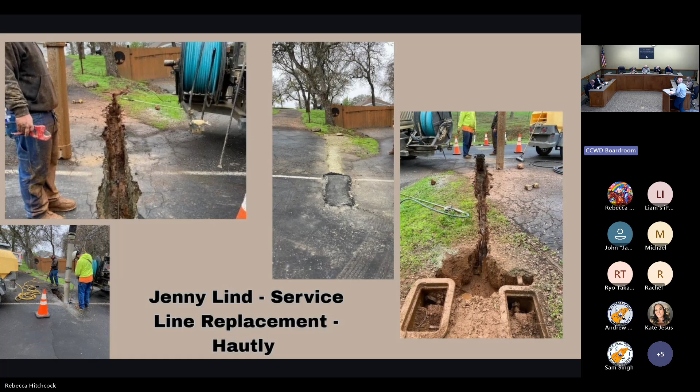Oftentimes the distribution crew, which is a separate crew completely, will expose a service line to make a repair and then find themselves in need of replacing it. This is an example of that. So they blow down, they see what's going on, and then they make the call that they're just going to replace the service. In this case, you can see it's a dual service, we call it, to two different meter sets in the bottom picture on the image on the right.

Okay, and then this is an interesting one. This is at the La Contenta waste plant. We have a potable water service that feeds water to the La Contenta waste plant for, as you can imagine, any number of things, but most notably there's a bathroom there, a sink, and a laboratory. But this is on CCWD property.

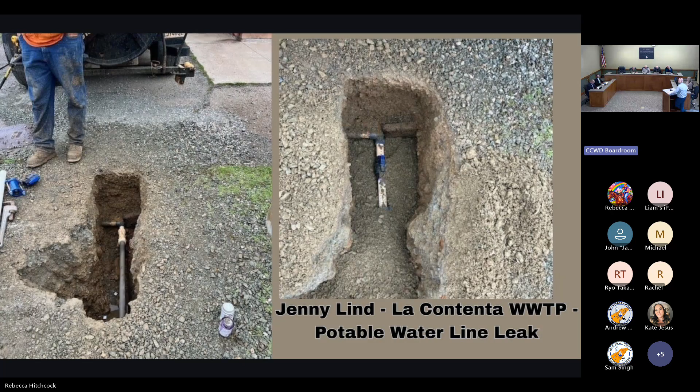The water line was installed years ago. This is a large area, so our guys had a general idea of where the water line is, however they don't know completely. So they have to expose the line and then follow it, and this is kind of what they're doing here. They note there's a buried valve in the image on the right, a coupling in the image on the left, and a T. Then they continue to look for the leak, the source of the water.

The first thing we had to rule out on this location is that it wasn't wastewater. It wasn't sewage, and it wasn't leaving the property, and that was very important, right? Because if it was, we would have had to report a spill, essentially.

So the guys continue to look, and then the construction crew gets involved because we notice on a rainy day that when the blowers at La Contenta kick on, you could see air coming out of the asphalt from the laboratory building. So we might need to take a look at that airline. The airline is large, it's 12-inch.

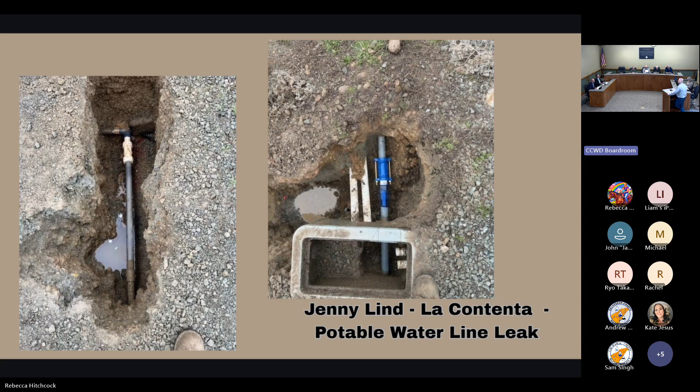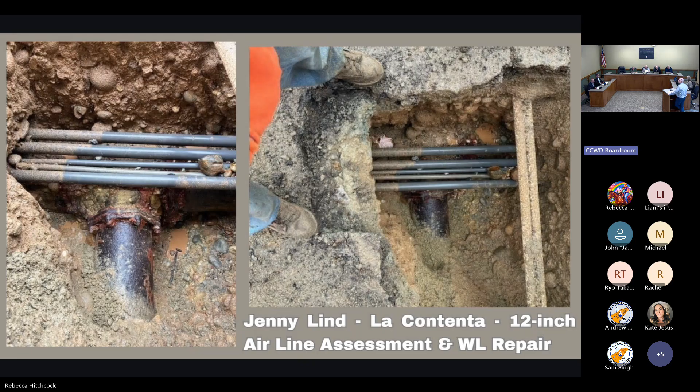So as our team exposes the 12-inch ductile iron line in the image on the left, under all the electrical conduit, we start to assess how we're going to replace this, because that aggressive soil has eroded that ductile iron pipe away. Lo and behold, the crew finds the source of the water line leak in the image on the right. You can see that coupling and you can see water spraying out of it. So they make a repair.

So it's often like one work effort flows into another. We have this exposed 12-inch ductile iron line that you guys can see is significantly corroded and needs to be replaced. So we start developing an operational plan. The construction crew, Pat and his team, and Jesse and his team get together and talk about how you're going to work through this issue and replace this line. And then you make the repair.

Unfortunately it's the entire line. If you can imagine that line extending straight, there's a basin on the left of it that holds sewage, and it's being aerated. We're allowing this natural process to take place. There are microorganisms eating the solids in the sewage. We're going to decant that water, filter it, and send it off down on its way. This line provides air to that whole process. It's almost a football field long.

And it drops in size, going from 12 to 10 to 8, 6 to 4. Unfortunately, the engineering team has informed us that in this area, related to the design of the new facility, the soil is aggressive. So unfortunately, the line was not wrapped, and this damage is from the soil.

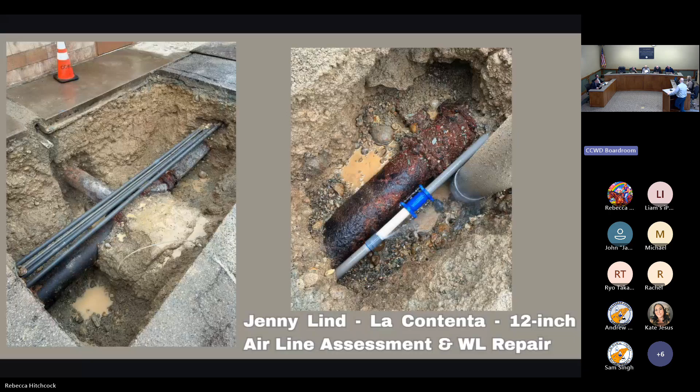And those are prime targets for vehicles. Cars love to run them over. There's like a magnetic attraction to air relief valves, so they're often destroyed.

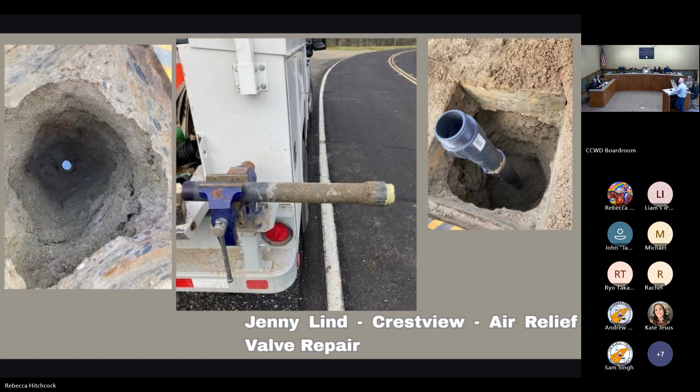So what you see here is the line, the mechanism on top of the standpipe, was broken. Our crews unthread that standpipe. They have to shut the water line off, unthread the standpipe. You can see it in the middle of the vise in the truck. Then they install a new standpipe and put a new air relief valve on, and backfill the standpipe line with usually AB rock and drain rock, and put it back in service.

There's a float inside that green mechanism. As air comes in, the float drops and the air can burp, and then when the water comes back in, it seals the valve. That's an air relief valve.

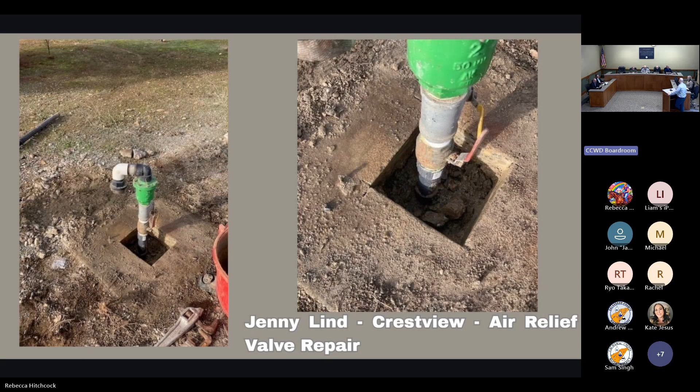How close are those? Do they stay that far out of the ground, and are they pretty close to the roadway? They can be well off the roadway, in any number of places. Sometimes when we can, we'll install protective bollards in front of them, depending on where they're at. Usually they'll have a box or some sort of cover over them. They can be subject to freezing depending on what size they are, so that's also an issue we have to pay attention to depending where they're at.

This is an example of some of the conditions of our pressure reducing valves out in the field. This is in the Jenny Lind service area, Garner and Friedman. A pressure reducing valve - you have a large valve, and you usually have a bypass valve.

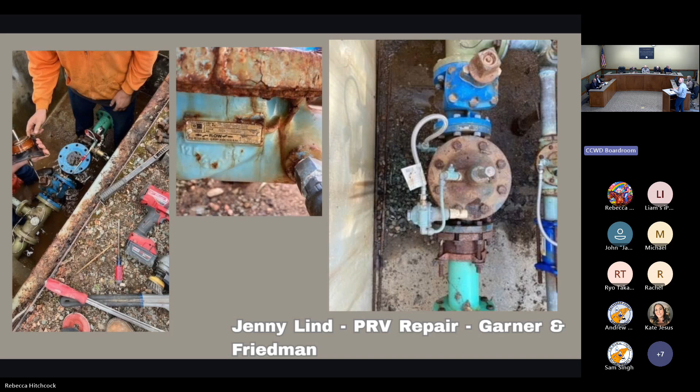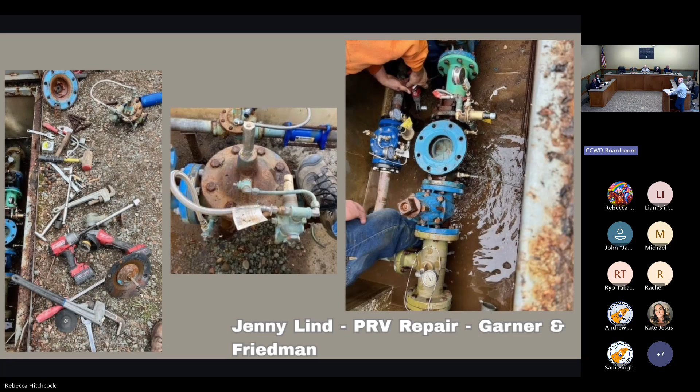The work here is a little convoluted, but in the image on the left, you can see they're taking apart the large valve to replace the components inside. There's a diaphragm, small operating equipment and components. Then the bypass valve, they just replaced completely. In the image on the right, you see that nice clean blue apparatus in the middle of the picture - that's the brand new bypass.

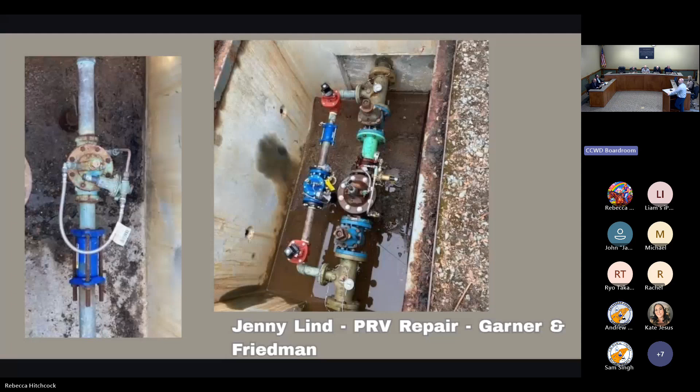And then some more close-up images of the two. Before replacement on the left, after replacement, that nice dark blue one on the right.

We have buried valves all over the system, so as our folks find them, they like to expose them and work to ensure that they're not buried again. You can see we poured some concrete slabs around these valves and built a retaining wall so that soil doesn't cover them up. Otherwise you're going to spend 4 hours with a metal detector walking around looking for a valve buried under 6 inches of dirt. This eliminates that effort and makes things more efficient in the future.

These are interesting. I just gotta say, your pipe work is beautiful. The retaining wall needs some help, we need some love there. I would call that a utilitarian retaining wall, right? We'll get some landscaping block out there. Some people use mortar between the blocks. Was it at least clay? Yeah, I think there's some bar in there.

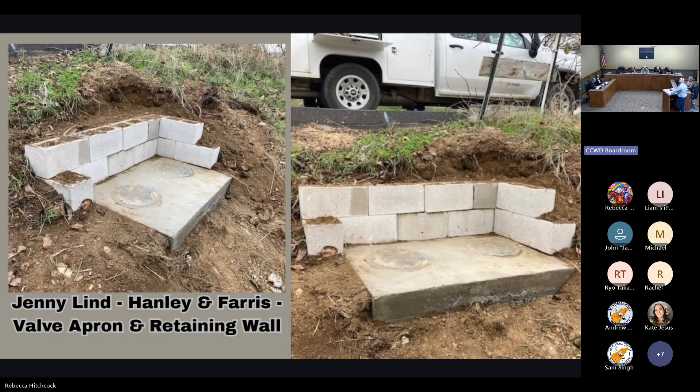Bar's going to keep it straight. Looks like it was backfilled with native. I think we're going to coat it with some leftover elastomeric coating you might have on, Kevin. Coat it with some of that. Rhino line it, we could do that too.

So there's this building that used to exist at Vallecito that we've moved all over the service areas. Here's another example of that, the construction crew moving this overhang building that we're going to use to cover rock and material in La Contenta.

Some of you may have heard of this. There are some manholes in the Woodgate subdivision where there's a swale around the collar of the manhole. CCWD is working to reestablish the grade on the manhole lid there. So we've saw cut around the manholes. This is a job that's in concert with the county - the county's going to go in there and reestablish the grade on the roadway as the district repairs.

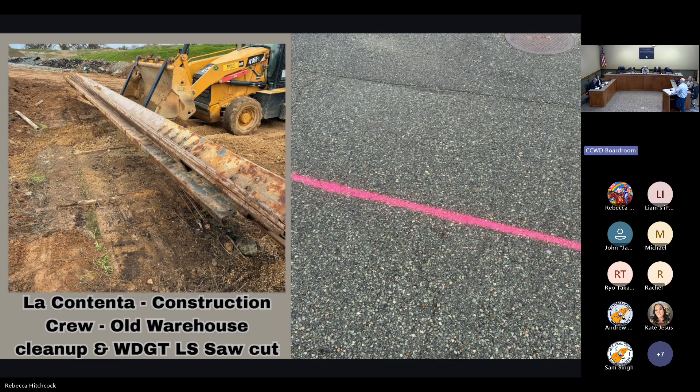Where's Woodgate? This is Vista del Lago North. You hang on the left. Oh, okay, yeah, Warmwood, Woodgate. Yeah, across the street. Yep, across the street.

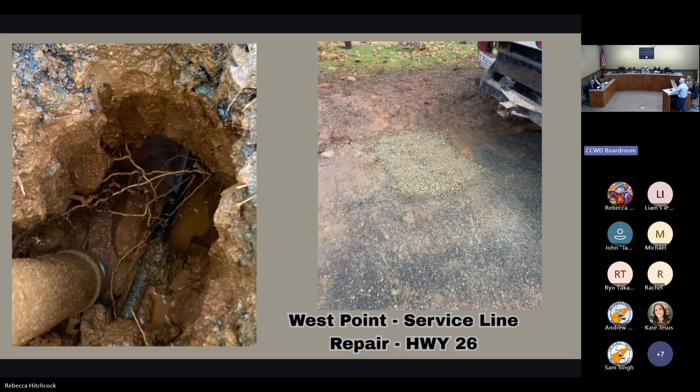Now we're jumping up into West Point. Another example of our folks' ability to listen for a leak and make a repair, exposing the leak pretty much right on top of where it is occurring. So obviously we want to minimize patches in the roadway, and it's really important that our folks listen and mark an accurate location to dig. This is an example of that. Hats off to Doug and his team up there - it's a team of one.

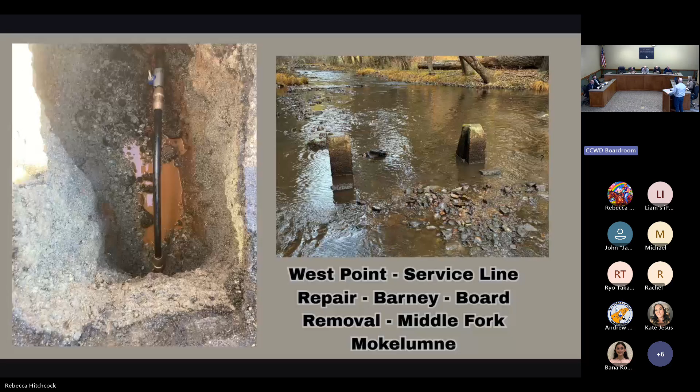In heavy rains like we had recently, how far up those bollards will that stream rise? Oh, right, all the way over. Yeah, it can still be taken out if a tree came down, potentially. Yeah, that's true, that's true.

Here's a great project, kind of tipping the cap to the work that our construction distribution crews do relative to ensuring that we have as many fire hydrants operational as possible. This is replacing 2 very old fire hydrants on Bald Mountain Road in West Point. It's kind of hard to see in the image on the left, but there was a service line that was actually tied into the 6-inch main right downstream of the fire hydrant tee.

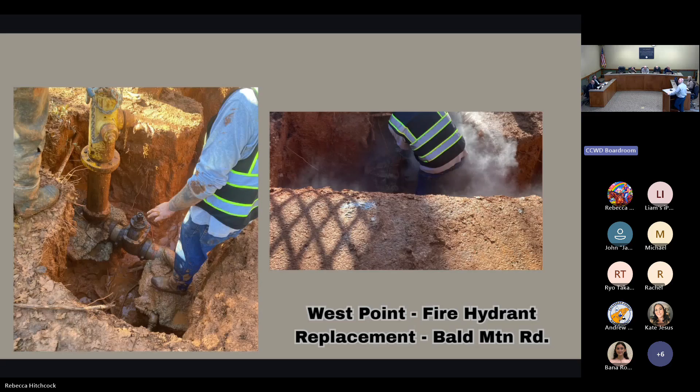The service line itself wrapped around the fire hydrant before it made its way over to the water main, and then the customer's private plumbing came back towards the fire hydrant, which you can see in that pipe kind of at the top of the left-hand image. Making sense of all of that on the fly is kind of an art, and our guys do that every single day, so hats off to them. They need to know what pipe to disconnect and what pipe to leave live, and this is an example of that.

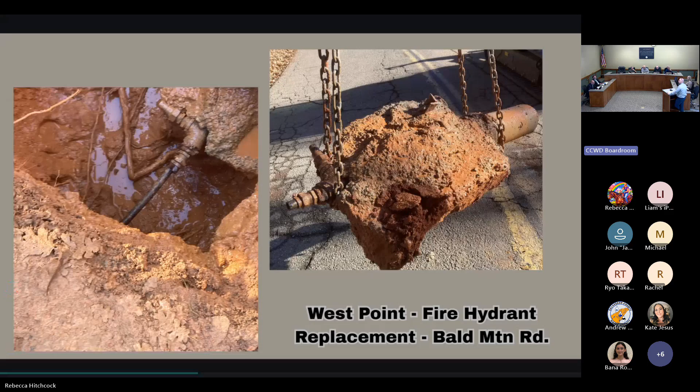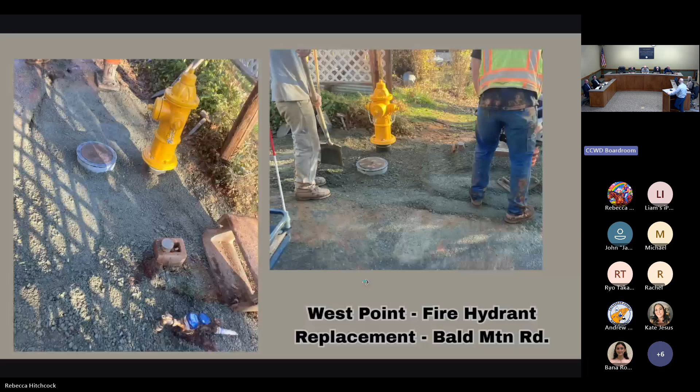You can kind of see that service in the image on the left. Here's the concrete pour on the fire hydrant kicker on the right, the old hydrant being taken away, pulled out of the hole. An example of the backfill and compaction of the brand new fire hydrant installation there, with the valve, G5 valve access in front of the hydrant. So you can isolate that hydrant if somebody decides to run over it and water shoots into the sky, rather than shut the whole universe off to turn the water off - you can shut that valve right there.

And here's kind of a before and after. So this is the old hydrant on the left with questionable operation, and then the image on the right, the sanitary concrete apron, the G5, and then the brand new hydrant.

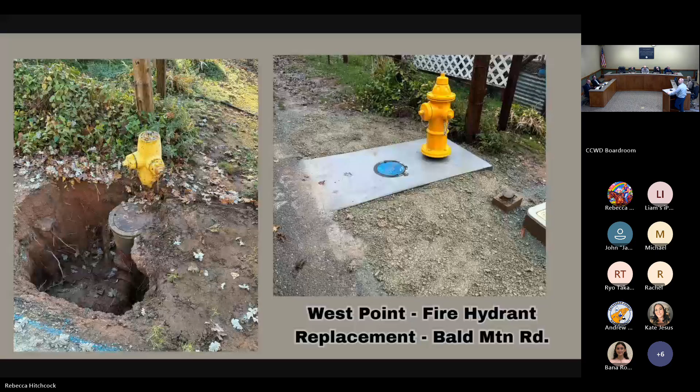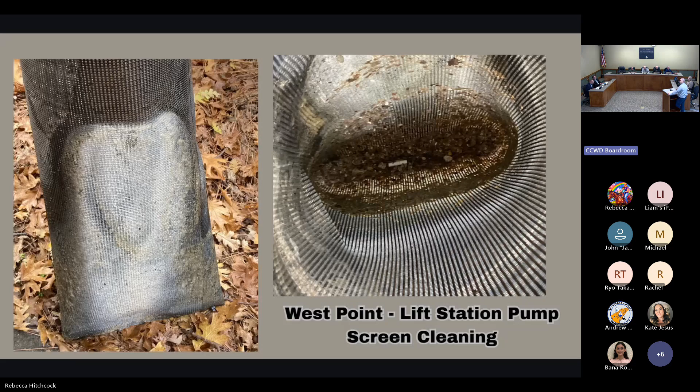Hats off to the crew for this. I love to share the lift station screen at the West Point lift station. This lift station pumps push the liquid sewage through a force main, a couple miles cross country, over a bridge, to our West Point wastewater treatment facility. Grease loves to collect on this screen, so Doug will pull this screen every quarter and hot flush it, getting all that debris off so the pumps can continue to operate without pushing up against a head that they can't accommodate.

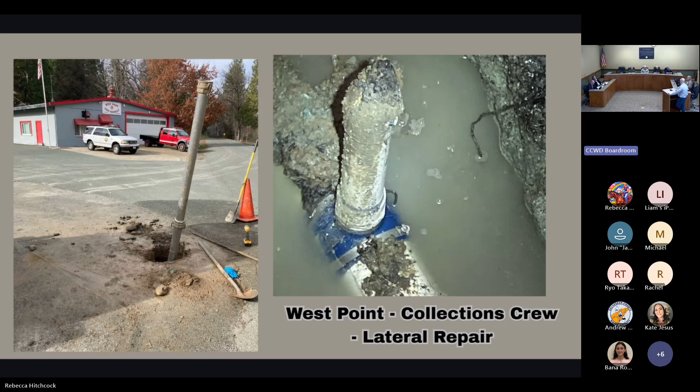So just a case and example where preventative maintenance can lead you to issues that you can then correct. Hats off to the guys for finding this as another holiday gift - I don't know if they wanted it, but they found it and made the most of it.

In the image on the right, they cut that cap and cleaned the debris out of it - you can see it's just full of debris. The image on the left is coming from the abandoned septic tank, which they flushed, cleaned, and evacuated all that water from the hole, then reconnected the whole system. So should that septic tank need to be used in the future in the community garden, it can be.

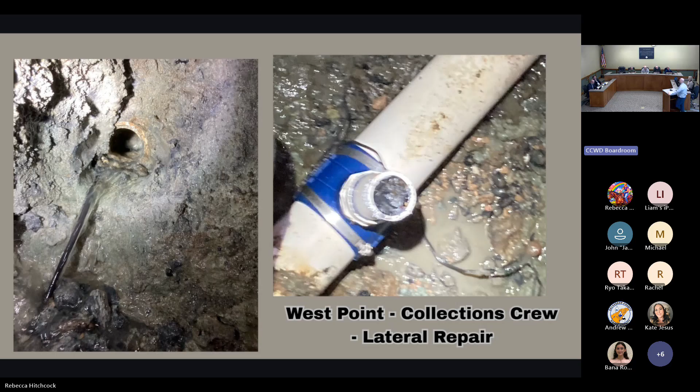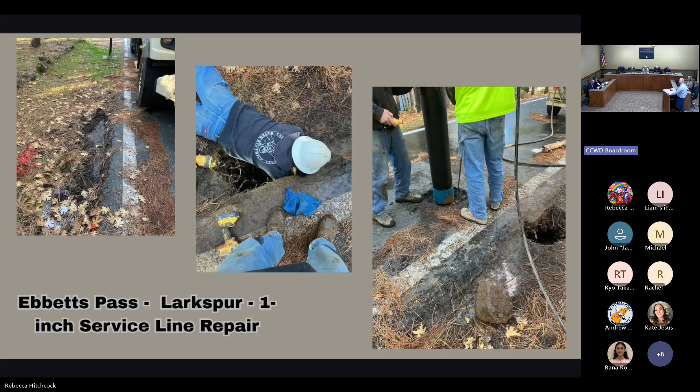Now we move up to Ebbetts Pass. This is a 2-for-1. There's a 1-inch service line in Larkspur with 2 leaks on it. You can orient yourself - you've got the hole in the image on the right, kind of on the fog line, and our folks are opening up another hole with the Vactor truck. You can see the pickup tube there. It's kind of hard to see, but there are 2 separate leaks on that service line.

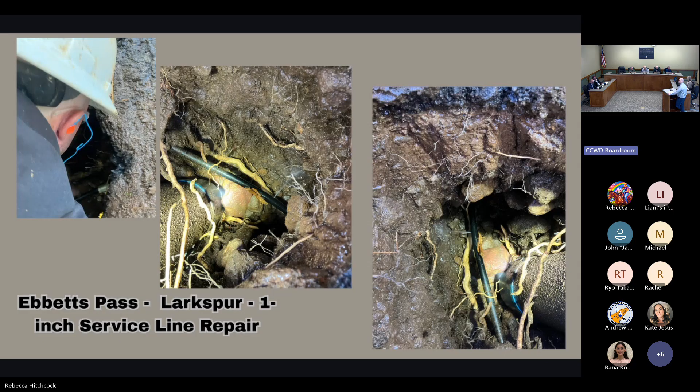You see all those roots in there wreak havoc on our system. They find a little bit of water, they're going to go ahead choke whatever it is they find and ultimately break it.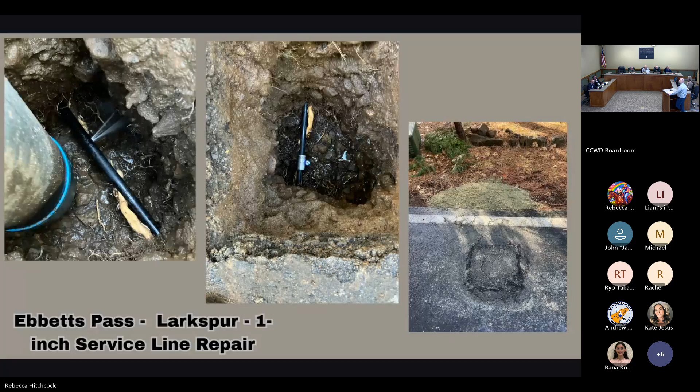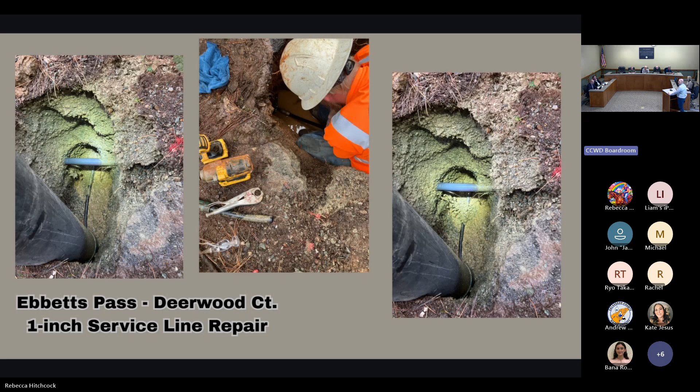Another 1-inch service line repair up on the pass. Just an example of the variability with backfill material that our guys find, and their ability to get into small, restricted places and make the work happen.

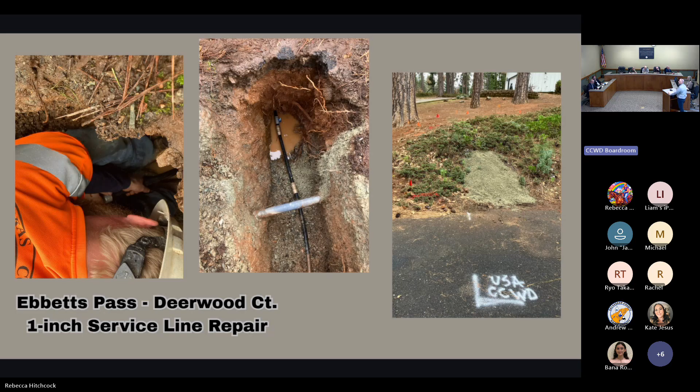You can see in the image on the right, this one was just off the road, and CCWD issued an underground service alert. You can see there's power right there, and there's a red flag in the image on the right. So our guys all of a sudden find themselves having to contend with power.

Curb stop replacement. So you guys get to see an example of what a curb stop looks like, often connected at your meter to your service.

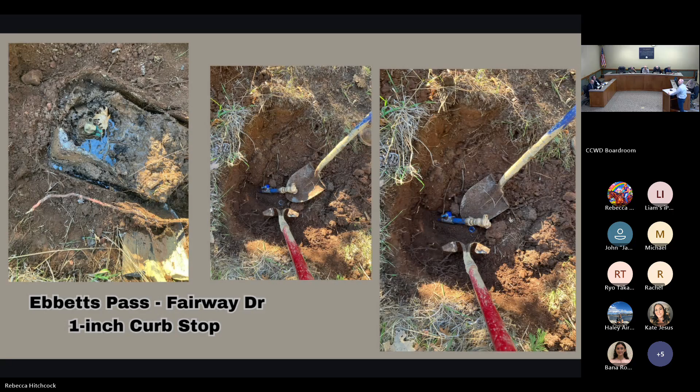Maybe this works better as a blow off. What kind of pressure is on a line? If you've got a 1.5 inch line, it's going to vary - it really depends on where it is within the system. We can have 120 plus PSI, or you can have 40. There's so much pressure variability throughout the system.

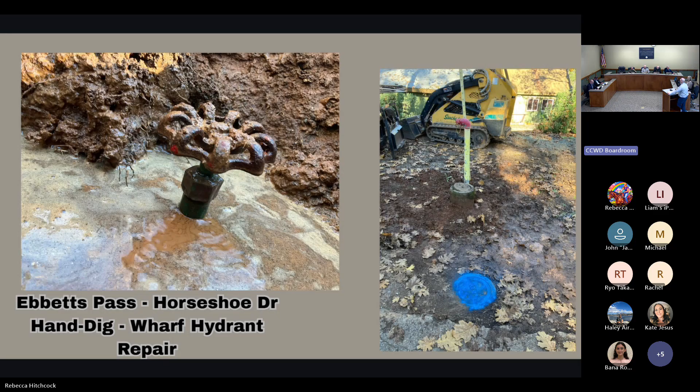I'm not sure, you guys, Kelly or Pat, you might know what the pressure is on Horseshoe off the top of your head. I don't. But yeah, it's 120 PSI on a 1.5 inch line - that can do a lot of damage. You can cut through some stuff. Yeah, right. But 40, not so much.

Here's an example of correcting some issues in the past. This is a pressure reducing valve piping intertie that in the past was broken, and our crews really wanted to reestablish this connection.

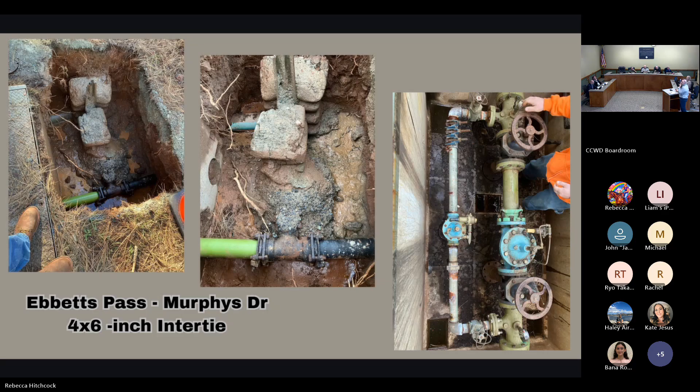You can see in the center image and the image on the left, there's basically a concrete kicker sitting on top of the line that used to be intertied to the line at the bottom of the image with the green pipe. For years, this has not been connected. So our construction crew worked with the distribution team up there to reconnect these pipes.

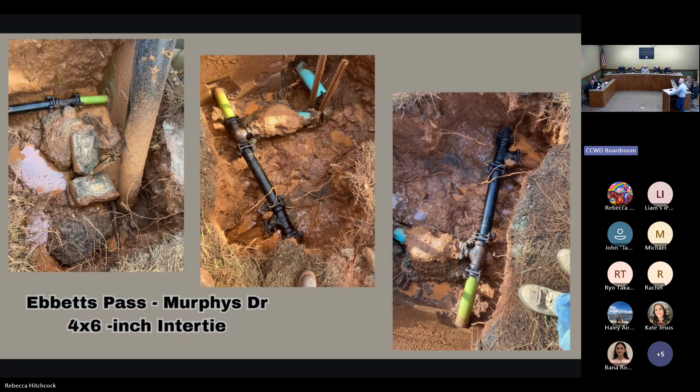This is just the stages of construction. You can see there's a concrete kicker in the middle image that needs to be pulled out so that line can be reconnected to that T. And then the work continues.

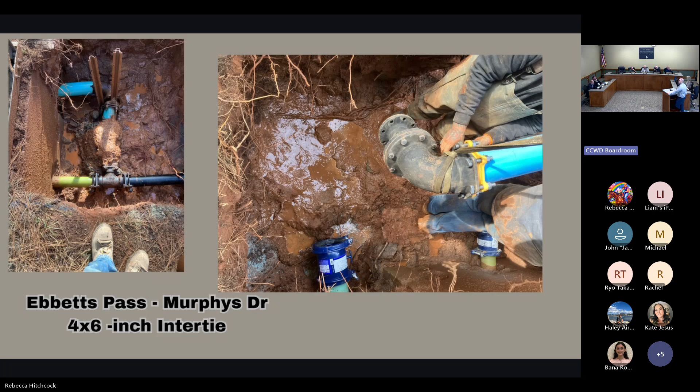The image on the right reminds everyone how heavy a lot of this material is. You've got a crane, and you slowly lower that equipment, the piping, down into the hole, then connect it and make the connection as in the image on the left, then backfill and compact in the image on the right, reestablishing that piping intertie.

This is an example of a call out in the middle of the night. Sometimes we talk about our on-call staff - they get a call, they might be cozy in bed, doom scrolling on their phone, and the next thing you know they're out on Navajo at 1 o'clock in the morning, looking at a meter box, shooting water 40 feet in the air. It's just an adventure every single night, right? Hats off to the guys that go out and do that work and make the fix.

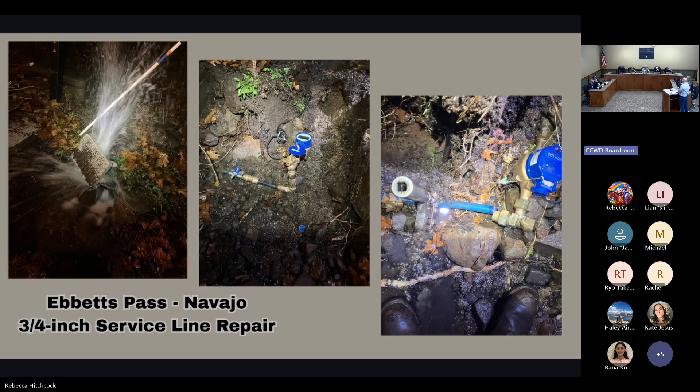Is that on the homeowner side of the line? This would be our CCWD side. So part of the art is determining that, trying to understand. Obviously in a situation like this, you're going to have to slow the water down to see what's really going on in the image on the left. But yeah, that's a lot of the conversations between on-call and customers - trying to understand and get them to give you a little more information so you can get an assessment of what's happening, because when you deploy, it's a lot. So you want to make sure it's a district issue.

In this case, the person on the right - were you up at 1 o'clock in the morning? That's not me. No, that is our illustrious collection worker, Tommy, who seems to be everywhere all at the same time. He does have a great haircut.

I love his haircut. But the image in the center, you can kind of see what they're cleaning off, so all that debris shot out of that meter box, AB and sand all over the place. It looks like it's right next to a concrete landing or maybe part of a driveway or porch.

Is that unusual to have that kind of debris in one of our water lines before it gets to a homeowner? It wasn't in the line. When the leak happened, the pressure blew all the material around the line out, and then blew it out onto the asphalt or concrete next door. Our guys aren't going to just drive off and leave that pile of debris sitting there, so they're cleaning up the mess.

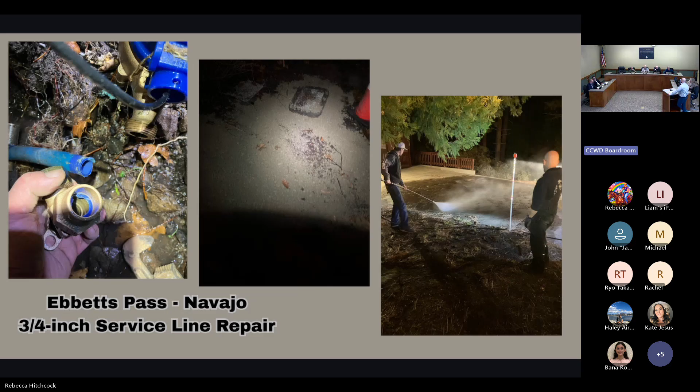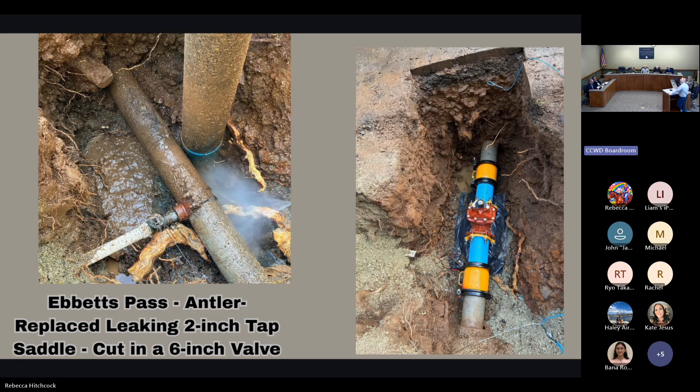Here's an example of replacing or cutting in a 6-inch valve in the image on the right, and also replacing a leaking 2-inch tap.

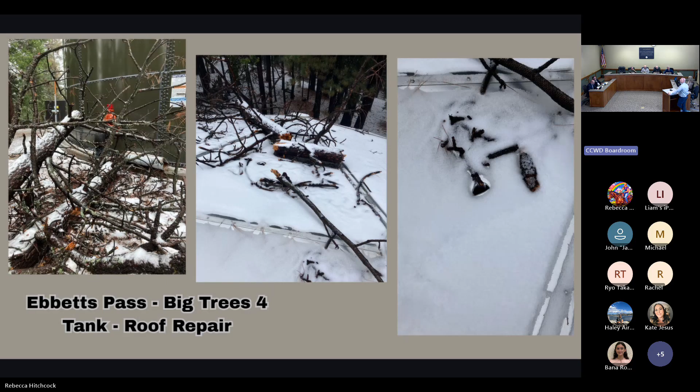We're diving into some unique failures that happened. A tree fell on the roof of Big Trees 4 Tank and poked 4 holes in it as it fell. This was the day after Christmas, and our crews are assessing some of the damage. You're not necessarily going to get a call from SCADA about a tank with a tree on top of it. How old's that tank? 3 years old.

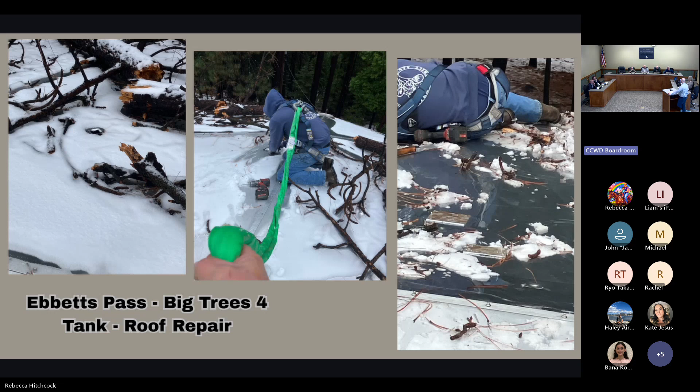It's imperative that we get those holes covered up ASAP, so our crews are up there. You can see in the center image our mechanic is tied off with a fall protection lanyard connected to the railing of the tank's ladder. Our distribution crew leader is holding it so it doesn't get caught up on anything while he's trying to move on top of the tank. You've got a coworker out on top of the tank riveting disinfected aluminum covers over those holes. In the image on the right you can see those little square metal pieces on top of the roof. Hats off to the guys coming out after Christmas, maybe after a bit too much eggnog the night before, and the next thing you know you're on top of a tank in sloppy, wet conditions.

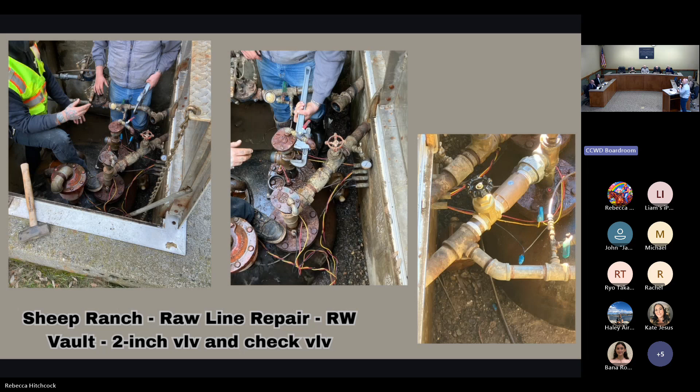This is a great example of making do with what you have. The raw line vault at Sheep Ranch is an interesting vault in and of itself. In that vault there's a 2-inch valve and check that failed. Our distribution crew and construction crew went up there and worked together, and you can see them on the left. They installed a new 2-inch valve and check valve, shown in brass in the image on the right. On the left you can see that the existing check had essentially split.

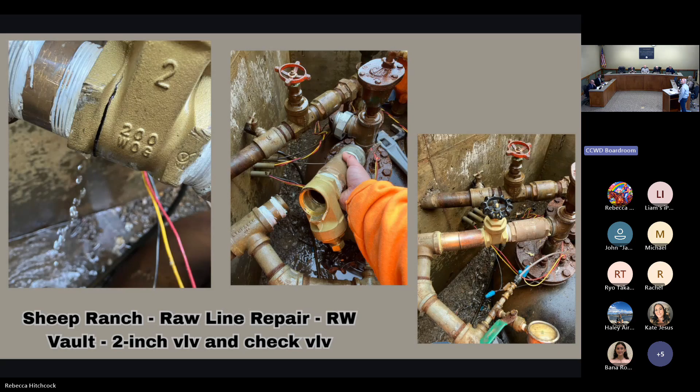This takes water off the Sheep Ranch pipeline conveyance from San Antonio Creek, and then pumps it up the hill to the Sheep Ranch water treatment facility, where it's treated for use in the community. The image on the right is the raw water vault.

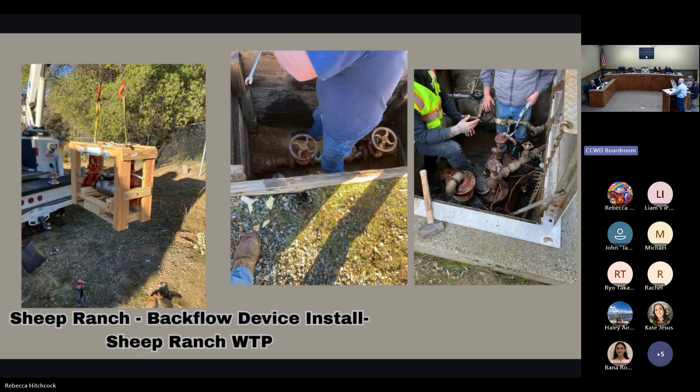Our mechanics then turned around and worked with the operators to install a new backflow device at the Sheep Ranch water treatment plant. The old one was quite old and in need of replacement, shown in the image on the right. You can see the brand new check in the image on the right here with new valves and everything installed. Sometimes you've got to cut things, sometimes you've got to weld out in the field - the image on the left illustrates some of that.

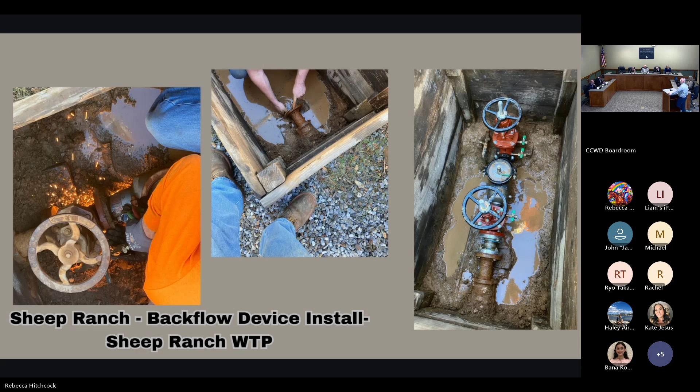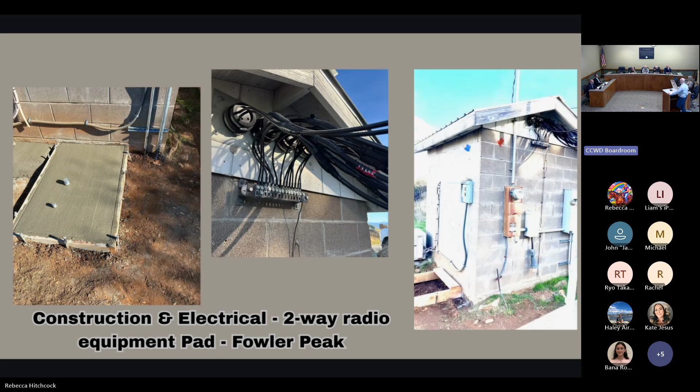Here's an example of our construction crew working with our electrical team up on Fowler Peak to install our 2-way radio telemetry. The sheriff's department was kind enough to allow us to put a slab up there and add some of our 2-way radio equipment, so we can continue to have conversations with each other when cell networks go down. That's really key for us.

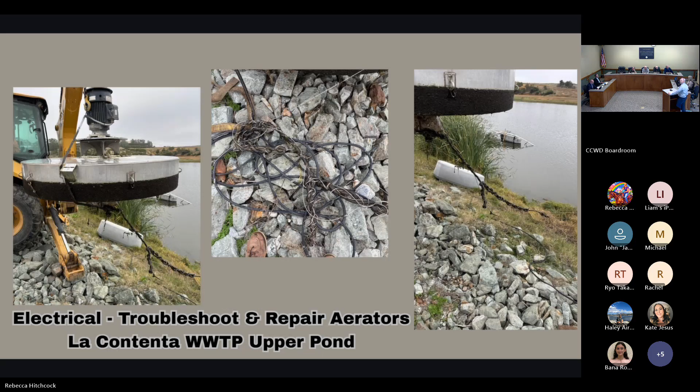Some more work with the electrical team, repairing aerators at the Upper Pond La Contenta waste plant. You can see how big the aerators are before they go down into the pond.

Annual flow meter calibrations happen every single year. Our electricians go out and calibrate all the flow meters that we have out in all of our systems. It takes quite a while to do, great job.

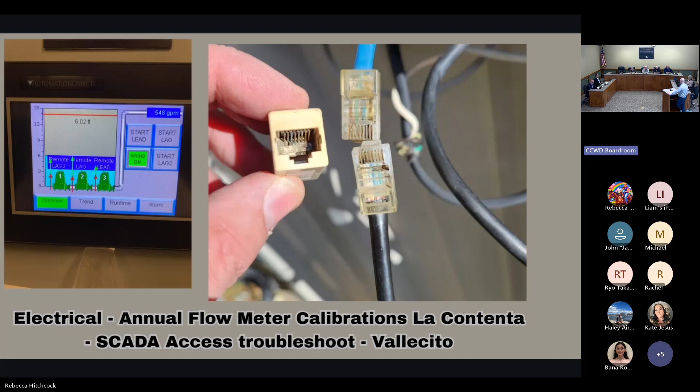Here's an interesting one. You can see the image on the left showing how you test your flow meter calibration. You look at SCADA images of what the flow was 10 minutes ago before calibration versus what it is now. How far apart were we? What does the 4 to 20 milliamp signal tell us? The image on the right is an example of spending all night trying to find out what's going on with SCADA, and realizing it was just a defective connector between two Ethernet cables.

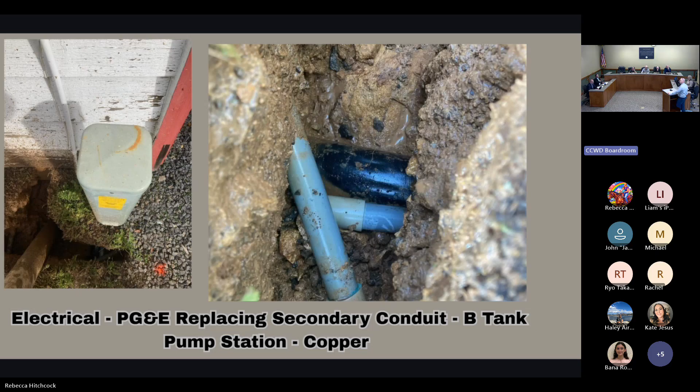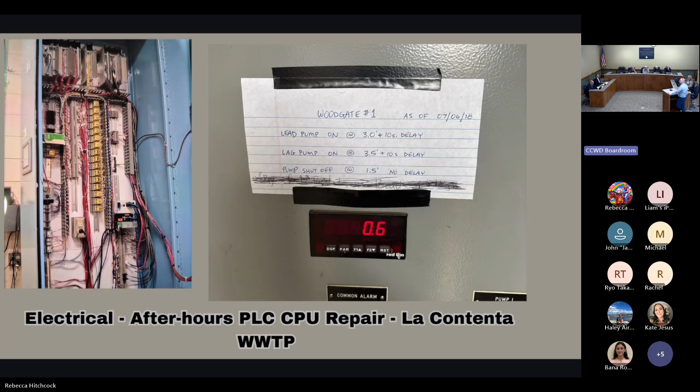PG&E work at B tank and Copper, replacing secondary conduit. Our crews have to work with PG&E to ensure our facilities remain safe and aren't inadvertently damaged in their process. Here's a PLC CPU repair at La Contenta Waste Plant - our electricians are out at all hours of the night making repairs. Finally, we publicly accepted bids for the critical facility generator replacement project here in this boardroom, and we anticipate bringing that to the next board meeting.

I have a question. Some of our constituents have pointed out that our leakage exceeds state standards. I don't want an in-depth answer, but I'm curious - are we working to meet that state standard? What's the big picture on leakage? We have so much water that relative to the cost it wouldn't be something we'd do, but is that something you're working on?

Absolutely, the short answer is we're absolutely working on it. We have a utility crew that all they do is replace service laterals. Remember too that we have 6 different distribution systems, so the severity of the issue varies depending on the service area. It's no secret that we've talked about La Contenta or Jenny Lind water system and the Copper Cove water system being the most leak prone, and that's where the focus remains for the utility crew.

Capital improvement projects also help address this. We do have an understanding of how we've improved over time with both capital improvement project implementation and service lateral replacements. We're starting to see a shift in the amount of leakage we have - it's decreasing.